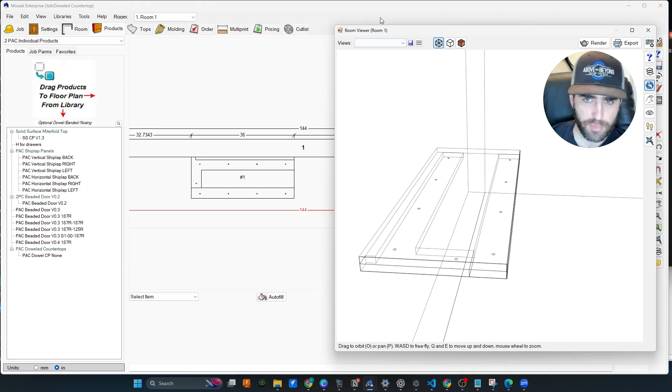I'll just start you from the download phase, import. We'll go through all the parameters and then we'll do a little advanced material type changing at the end in case you want to add new products to the library or use it in a different way.

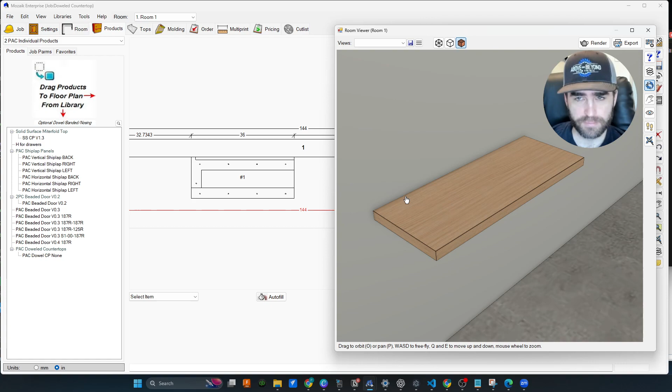Starting out in the downloads folder, you're going to download this from the site. This is the dowel countertop none, it's just finished none. So you're going to take this, right click and copy.

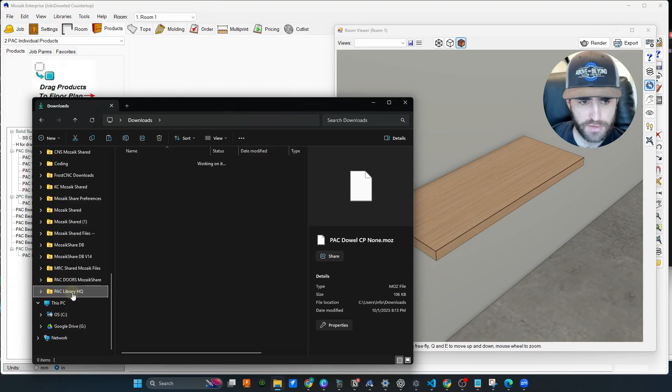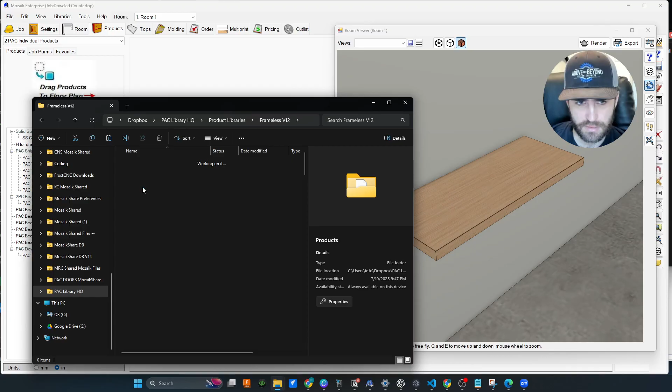Then you'll go into your actual Mozaik folder and find your whatever folder you want to put it in. So I have an insane collection of libraries in here, but let's say it's Frameless V12. And we go into products, and I'm just going to find some blank space in here. Right click, I'll paste. Now we have it inside that folder.

Now we're simply just going to go back to Mozaik, libraries, products. We'll find that library, Frameless V12, go down here, and then you can pretty much bring it in wherever you want. I'd probably put it in sub-assemblies, right click on sub-assemblies, say add product, and then import.

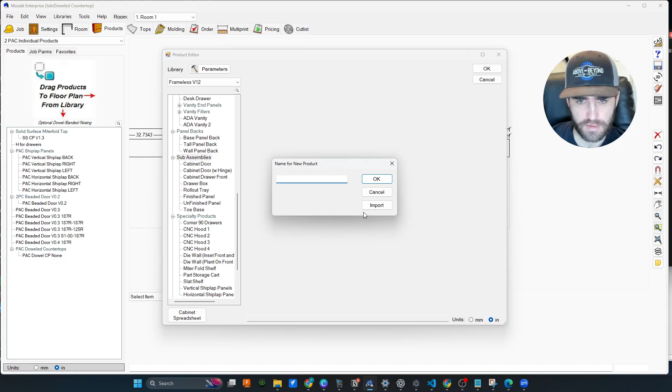Remember, you have to have version 14 or later for this product. Then you're going to find your dowel CP none up here. Left click once, say open, and then click on OK. And now it's in here for us.

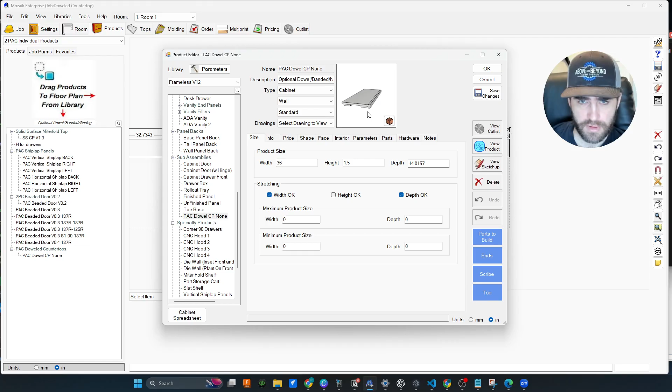Alright, it's defaulting to 3/4 nosing. Now we can just bring that into our job. So we'll go to Frameless V12, go down to sub-assemblies, we have the PAC Dowel CP none. Just throw that in the room.

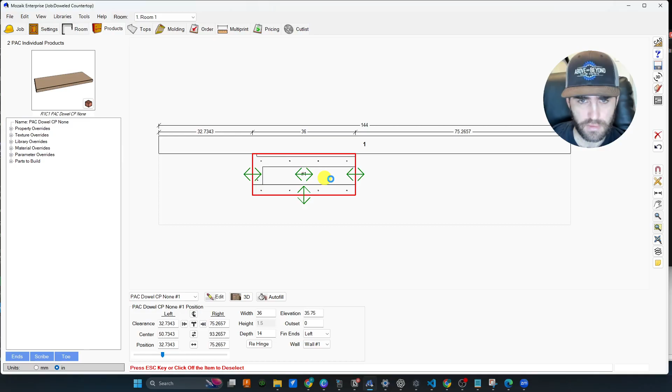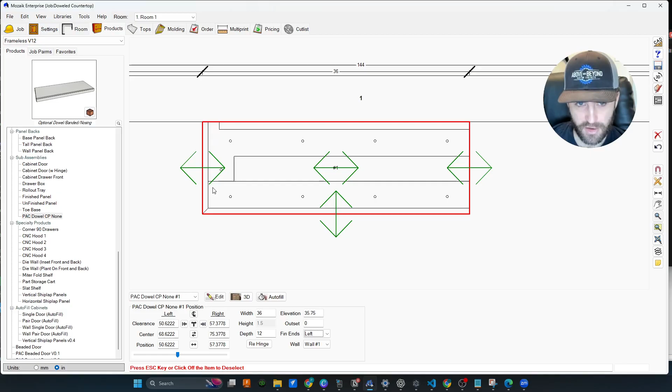Alright, cool. So let's go through some of the features. Right now, this is obviously finished none on both sides. If we go finish left, the build-up is actually integrated so you don't have to worry about this little piece. You can add mid build-up if you want, it's an option. We also have this handy little scribe thing in the back, this is for your bearing to rest on while you're flush trimming the nosing.

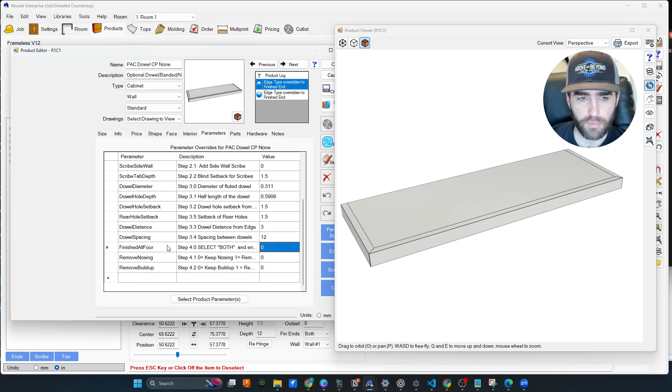You can also go in and change this to finish both. Then if you go to finish both, you can go into the parameters tab, and then at finished all four, you just click on one and it will do all four sides for you. Pretty handy, so that only is activated when you're on finished both ends.

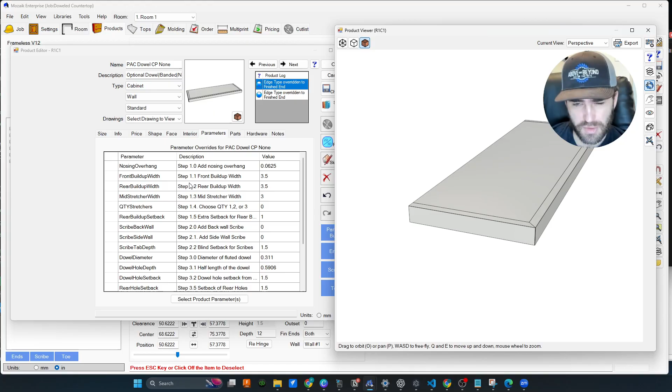Now let's just go through all the parameters. If you wanted to just right out of the gate save this as a finished end both, you'd want to do that before you make any overrides. So you do that now. I could say finish both, then save to library. It's going to save that to the bottom of our Frameless V12 library down here. Now we have a CP both.

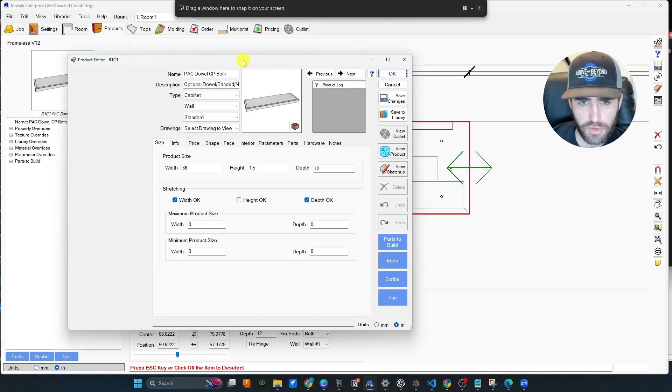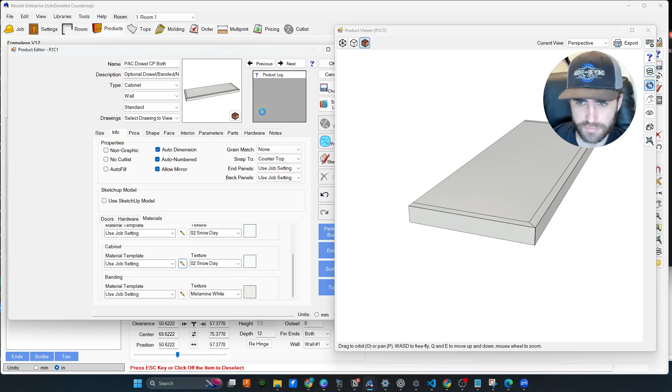If you're not doing nosing and you just want to do 1mm banding, it's a very easy change to make. The override is in the material templates. So I would go into the info tab, override this cabinet material, the pencil, and then go find the nosing part type and change that to 1mm or whatever you're using for banding. That's going to automatically change everything.

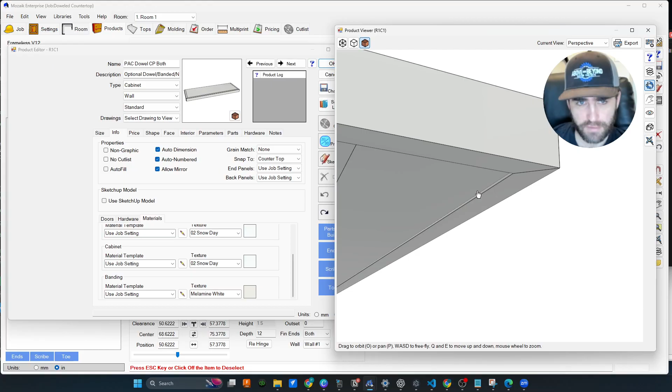Alright, so I'm going to undo that, we're just doing the nosing version right now. And you can see there's a little bit of overlap here, so we have a little overhang so we can flush trim something off. 1/8 inch is usually typical, or 1/16, you can do whatever you want. It's all going to show off of the bottom, just going to make that nosing wider for your cut list. So I'm going to change that to 0 for now.

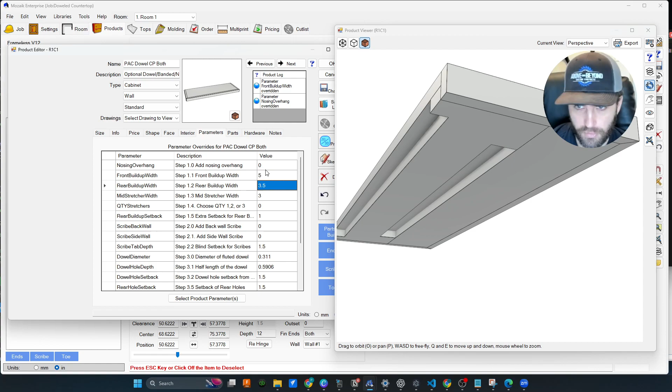You can change your build up width, obviously, change the front one or the rear buildup. You can make it smaller or bigger, or whatever you want to do. You go 2 inches for the rear buildup, it kind of does it as an offset.

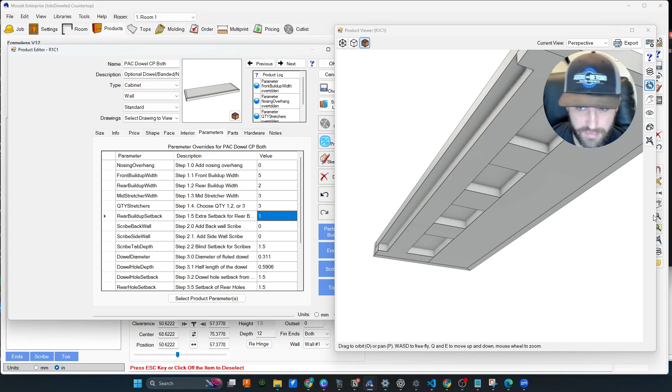And then if you want to have your stretchers in here, you can just say 1, 2, or 3 stretchers. Now on 3 stretchers, I don't have them perfectly distanced, it doesn't matter. There's actually no dowels in those stretchers, that's for your guys to just put wherever they need to, in case this is a longer countertop.

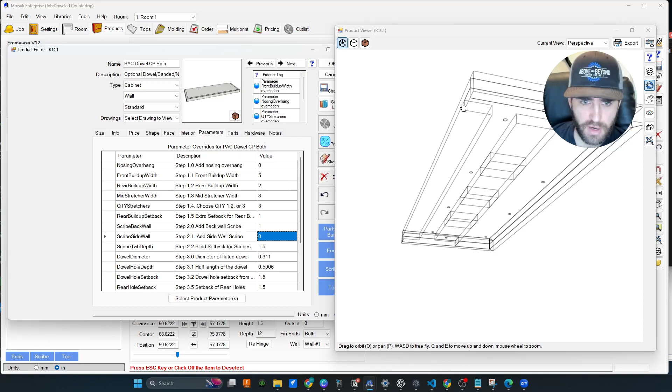Alright, so you can also add back scribe. If you add 1 inch of scribe, it's going to go off the back end. Important with scribe, it's shooting it out of the red bounding box, that red box is 12 inches. It's like we have entered down here, going an inch past that, that's how the scribe works in here. You just have finish left turned on, finish right, then the side scribe will be activated.

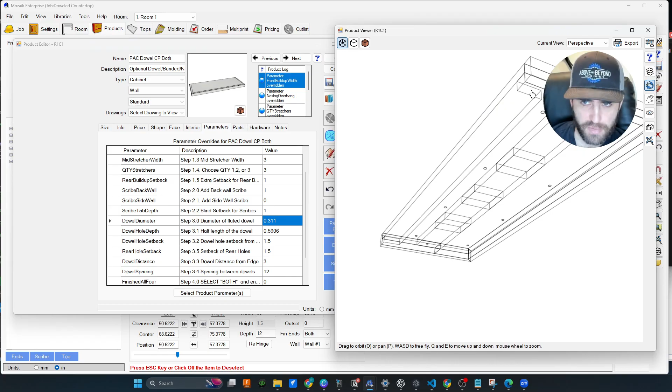Now let's go through here, we have a scribe tab depth, changes to 1. That's just whatever you need for your bearing to sit on to flush trim this off right here.

And you don't want to get too small, otherwise your machine's going to break that right off. So 1.5 is fine. That tells the guys where the nosing is actually going to stop.

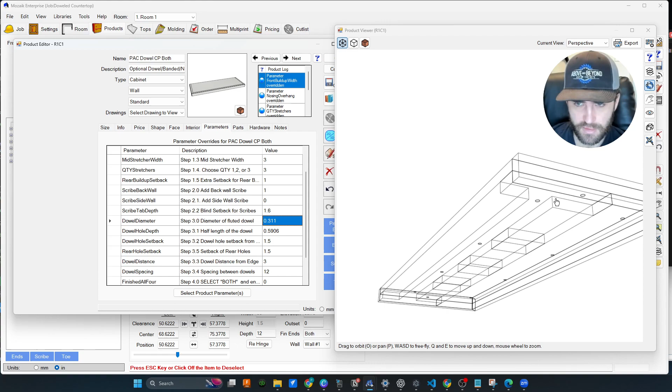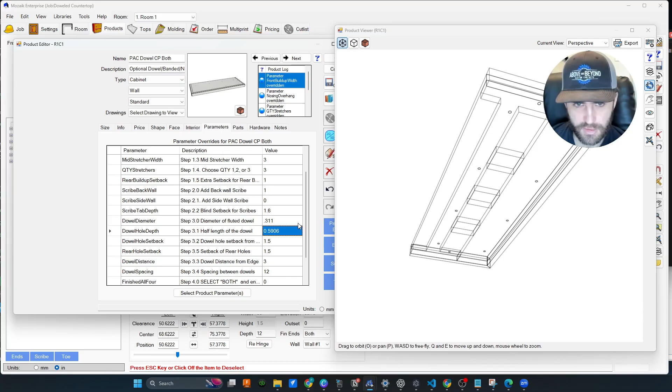All right, so the next thing we can do, we can change our dowel diameter. You could change it to 1 inch if you wanted to - I don't know why you would, but you can do it. So do whatever you want there. We'll change it back to about 8 millimeters. 8 millimeters is really the standard for dowels, 8 millimeter fluted. You can find some 5 mil out there if that's what you're into.

And then this is how you set the depth for your dowels. So if you're using 30 millimeter dowels, you probably want to set this to about 15 or 16. This is just half the depth. I don't really know why I did it like that, but I did, so that's what we're stuck with.

So you could actually change your spacing of the dowels if you wanted to. Go to 8, change the spacing. We'll just keep it at 12 for now.

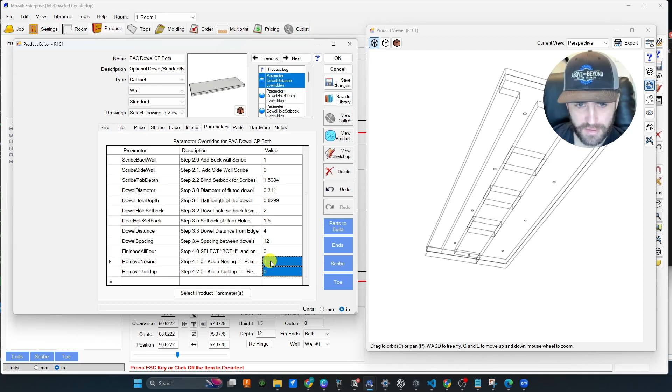The last thing, these are kind of just bonus weird features that I added. We can actually just remove the nosing if you want. That would be for like if you just want to have a pre-lam countertop and you're just going to put banding on this, but you don't care about seeing the lines. This is what I would do for a pre-lam.

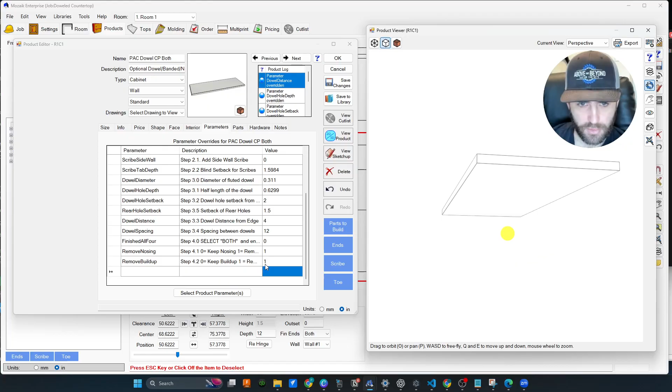And then you can actually just remove the build up as well if you wanted to. I don't know why you'd want to, but it's possible.

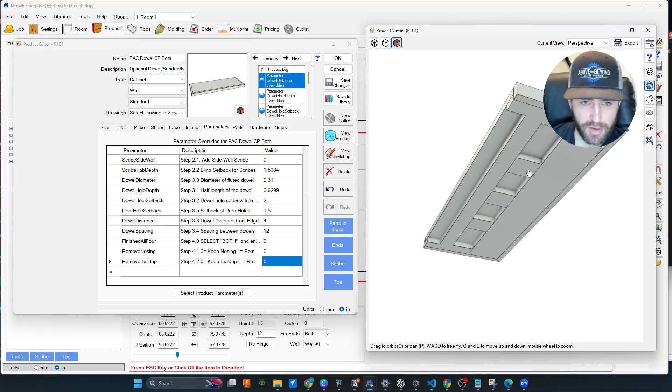Okay, that pretty much walks us through everything we need to know about the countertop except what material this is using. That's pretty important. All the nosing is using nosing part type, and the tops and the build-ups are all using top part type. You can go into the parts tab and change all that - you could change this to countertop, you could change the build-up to stretcher, and it'll work out fine for you. I would just leave it as top though, because you're going to run into situations where this is kind of distracting that this has been paint grade the whole time, so let me just change that.

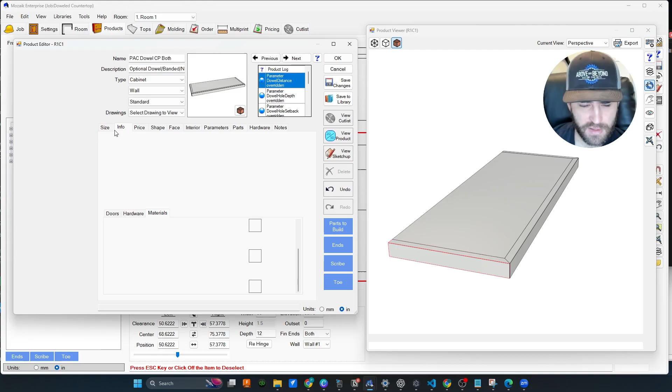If we wanted to change that just for this, go into the textures. You find a nice oak.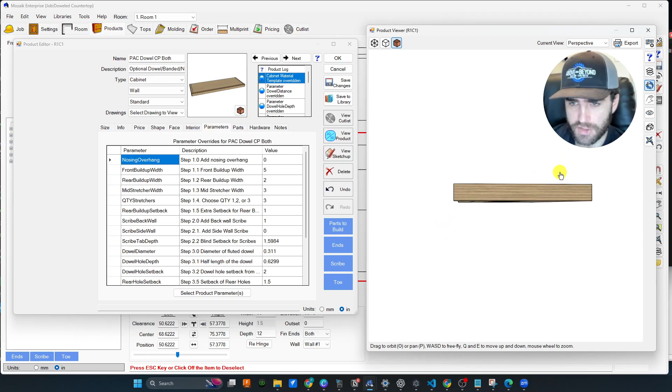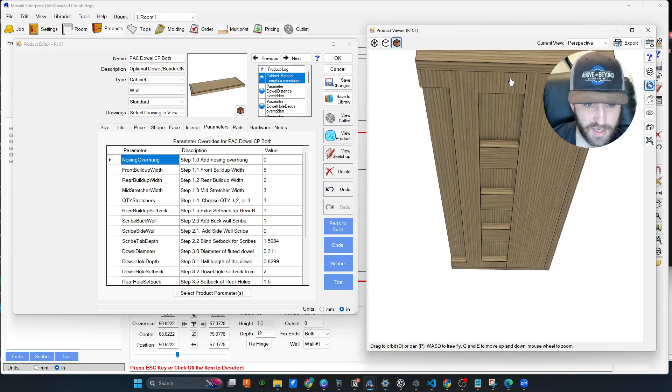So if you want to change from top type, the reason I made this top and the build up top is because sometimes that overhang is going to be a couple inches and you want that to be the same veneer grade that you're using up top, and you might as well just use it on the back too. But if you're trying to save on material, just change this to stretcher type or go in here and literally change the part material. It's fine.

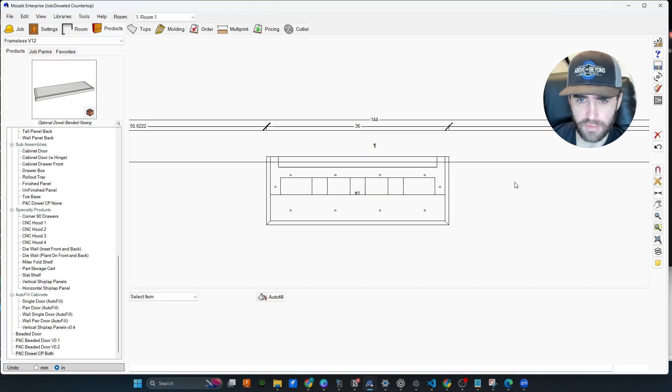All right, so once we say okay - and I did a bunch of weird stuff to this - it's putting the dowel in the stretcher obviously and the top. We can send it to the CNC. Now the only other thing you really need to know how to do is track down those different part types and what material is being used.

Right now we're using this white melamine for everything because all we did was change our part type. Now we want to change what material this is using. We'll go to materials, and I'll just change everything in the cabinet.

So we'll go into cabinet and we'll change the top. If I change the top to some kind of 3/4 plywood, it's going to change all of our parts to 3/4 plywood. The nosing is still 3/4 white melamine

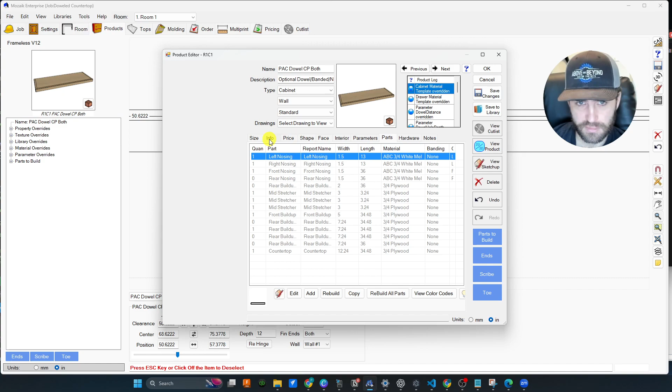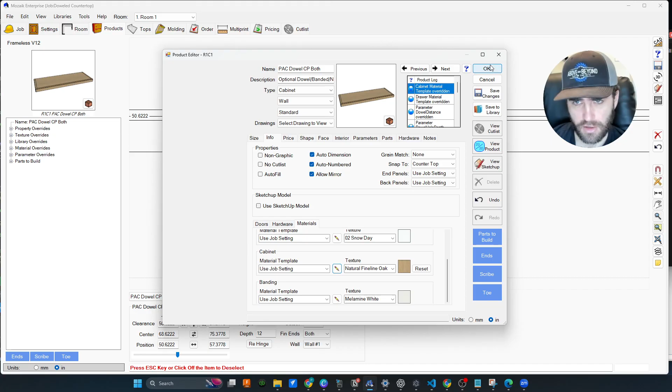because it's just going off of our settings tab. So if we click on the pencil, go down to the nosing, you can change the nosing to whatever you want. Or you could just override this with a custom cabinet material template - just make one that's called nosed top or doweled top. You can attach the material to that instead. Either way, it's pretty easy to just go in and change these things.

All right, so that's it for the product. If you haven't purchased it yet, all good - you can just take some ideas from this. I don't really share the formulas or anything, but you can kind of see how it all works and maybe get some inspiration for your own product.